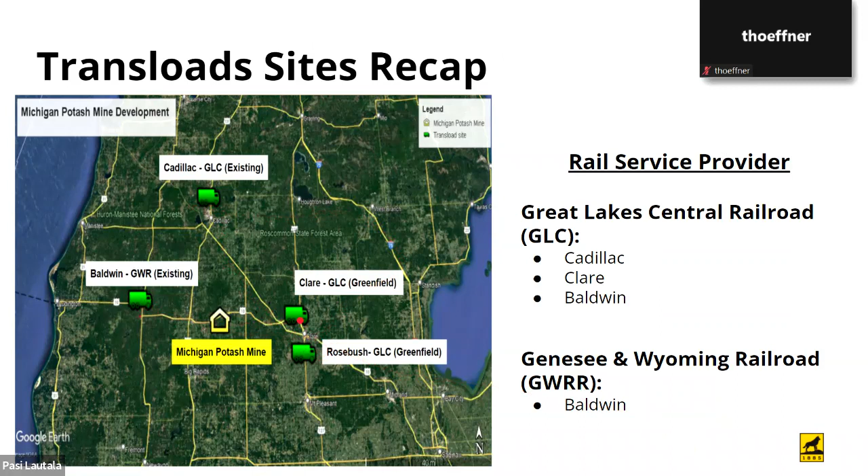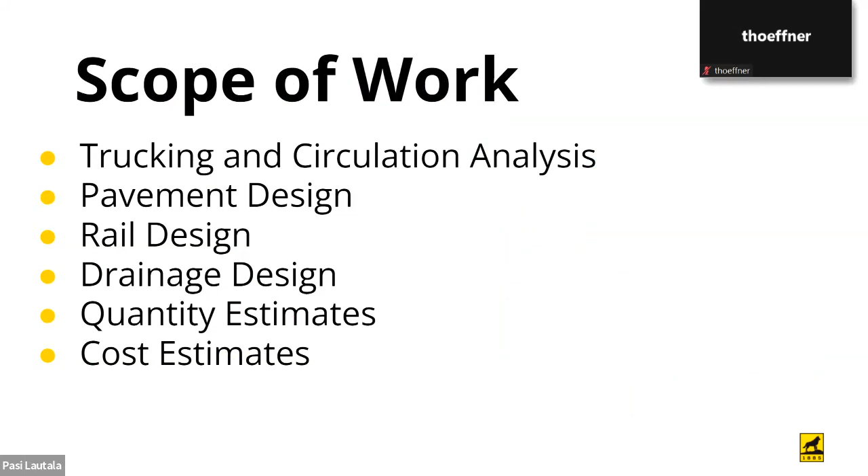So the scope of work for both teams was trucking and circulation analysis to and from the planned mine itself and to the existing and greenfield sites, pavement design for all four sites, rail design or rail operational analysis if there's already rail there, drainage design, quantity estimates, and cost estimates.

So some design-based assumptions are that all sites will be serviced 5 days a week. 5-day operation requires 1 day of storage, which is 13 rail cars. So phase one of the project will be 325,000 tons of potash per year, with the projected expansion for the second phase of 650,000 tons of potash. For our rail design, we use CSX standards. And for our road design, we use MDOT and AASHTO standards.

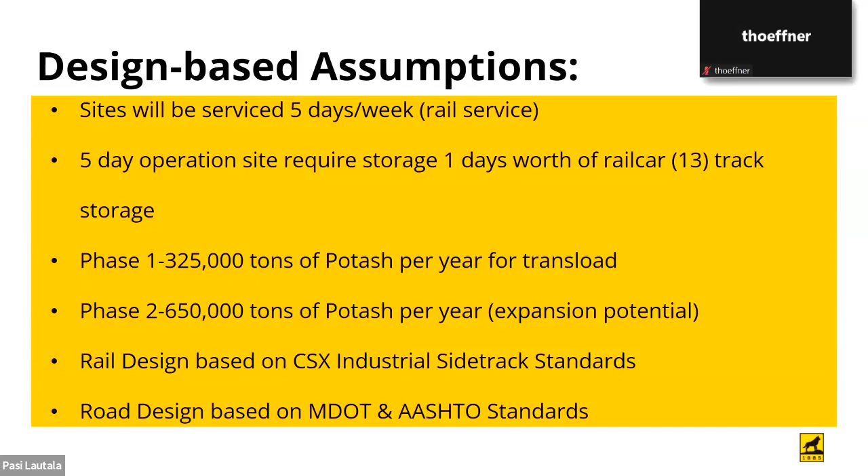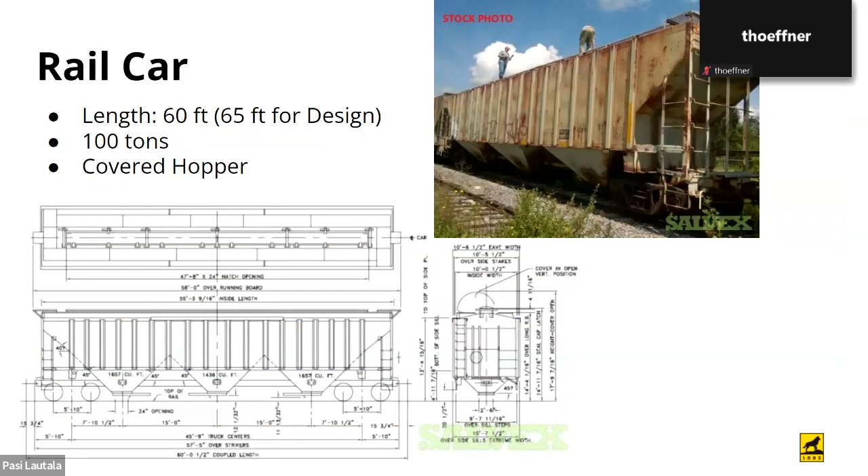So a typical rail car is 60 feet long, but we use 65 feet for design, just so we have some leeway in our estimates. And they carry 100 tons of potash and they're covered hoppers. The design vehicle was called a Michigan Double, which can be seen as 73.3 feet long, and the legal max truck length in Michigan is 75 feet. So we're just under.

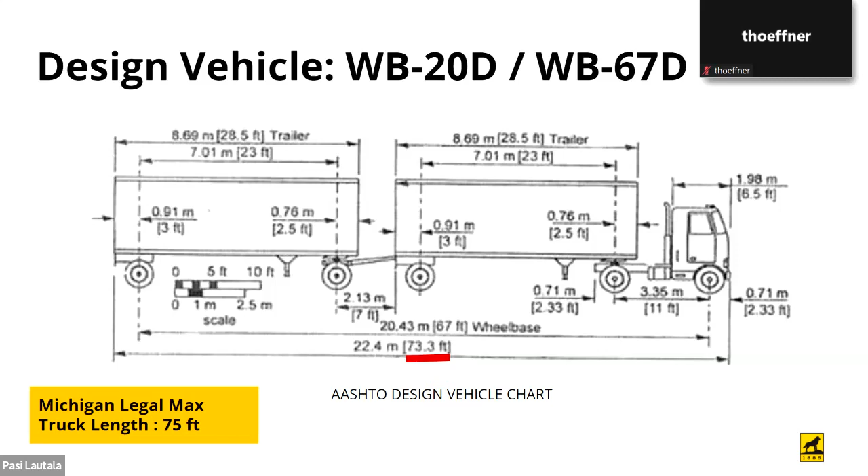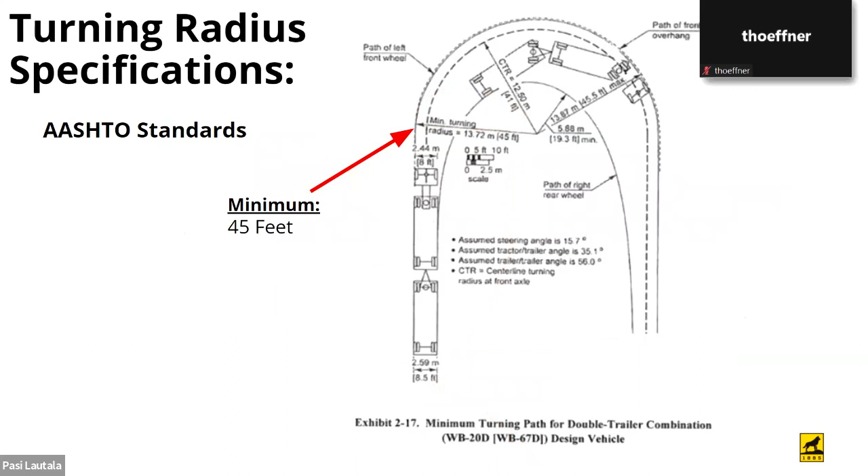The minimum turning radius for our pavement design can be seen as 45 feet from a central point to the outside of the curve. So we use that for all of our pavement design and all of our sites. Here we have some material specs. On the pavement side of things, we started off with a foot of class 2 granular subbase. On top of that will be 12 inches of 22A base. And then we have 3 courses of asphalt. The first 2 will be 2 separate courses, each 2.5 inches of 13A with 0.1 gallon per square yard of bonding agent between them. And then to top it off will be 1.5 inches of 36A.

For the rail, we got 4 inches of sub ballast, 6 inches of ballast underneath each tie. And then the ties will be 6 inches by 8 inches by 8.5 feet. Our rail sections will be 39 feet long each. And these are 115 RE rail, which is a heavy rail designed specifically for mining.

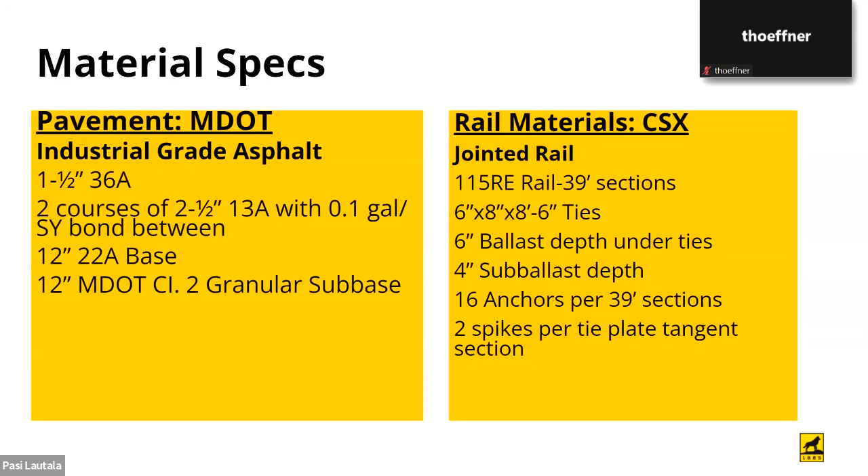Quick overview of why we chose asphalt over aggregate or concrete. A couple pros: it's cost effective, it's pretty quick to install, easy repairs, and importantly, it's flexible under loads, which there will be quite a few of on these sites. A couple cons: it creates greenhouse gases, and its longevity compared to concrete is a little bit lacking, but we feel that the pros outweigh the cons, and that's why we chose asphalt.

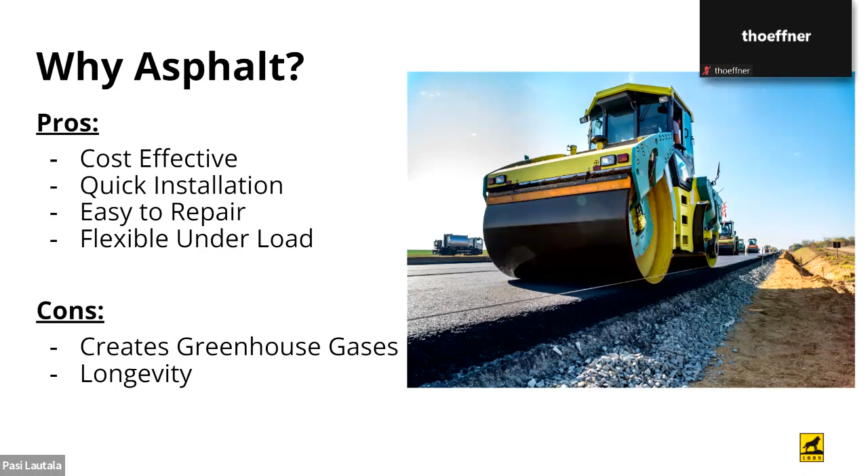This shows a typical pavement cross section. It just emphasizes what I said in the material specs. You've got your foot of granular subbase, followed by your foot of aggregate base, and then 6.5 inches total of asphalt with the 3 separate courses. Oh, sorry, I wanted to go back. The ditching for the most part is going to be what you see here, but each site is going to vary slightly. And the same goes for the sloping and crowning of the asphalt. Each site will vary slightly, but this is typical of what you'll see.

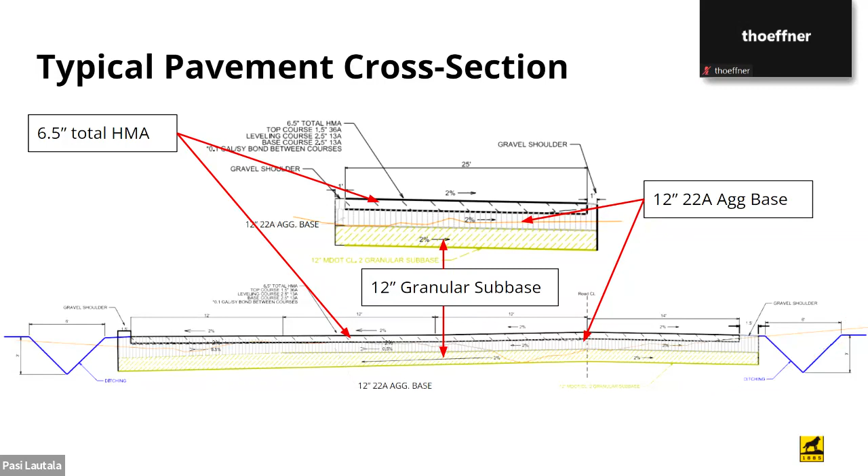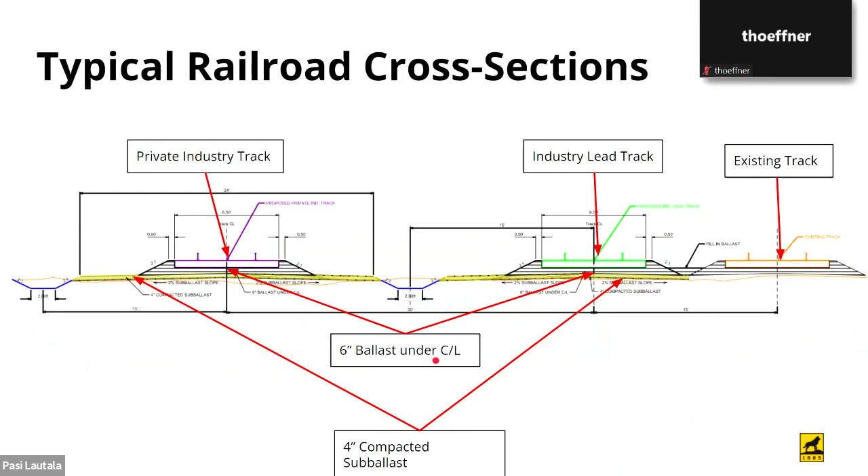Same thing goes for the railroad cross sections. You can see the 4 inches of compacted sub ballast, 6 inches of ballast on top, and then you'll have your rail. And just like I said before, the ditching is going to slightly vary, but that's it for the most part.

And then for our rail operations, we chose to use trackmobiles. This would eliminate the need for a mainline locomotive to be on site for our switching operations. And it also went with our wanting to make sure we did all the switching off the main line. By using a trackmobile, we would save quite a bit in operations costs versus maintaining a railroad locomotive on site and the crew that goes along with it.

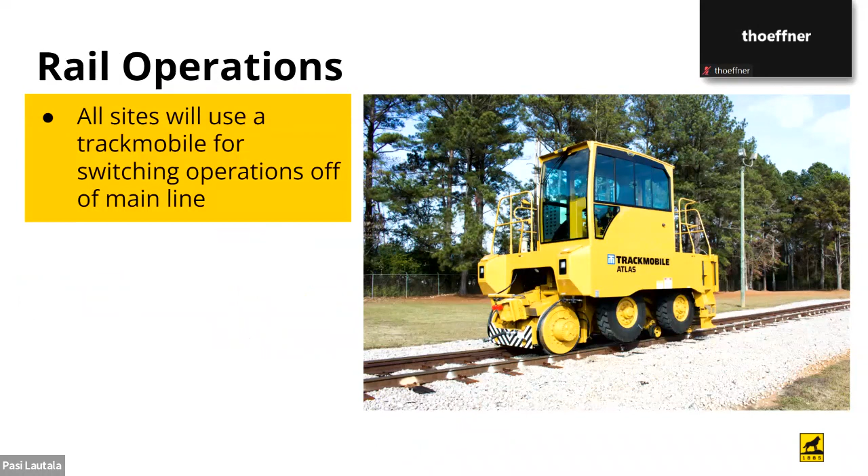And then next up, we're going into our quantity analysis. This is one of our first steps to determine what the size of our sites would need to be. So we started off, all our sites' initial designs are based off of the phase one, 325,000 tons of potash per year. And then we broke it down using 50 weeks per year and a 5-day operations week. This gave us a total of 1,300 tons that would be transported per day. This would be based on one site.

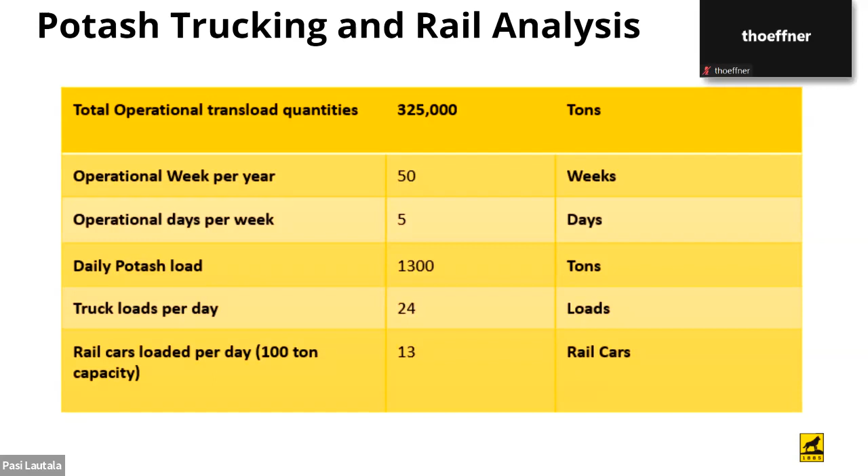And then from that, it would take 24 Michigan double loads per day from mine to transload. And that would be loaded into 13 rail cars with a 100-ton capacity. And then going in here, we calculated travel times between the mine and each transload site. We based this off of using Michigan doubles and a max speed of 56 miles per hour.

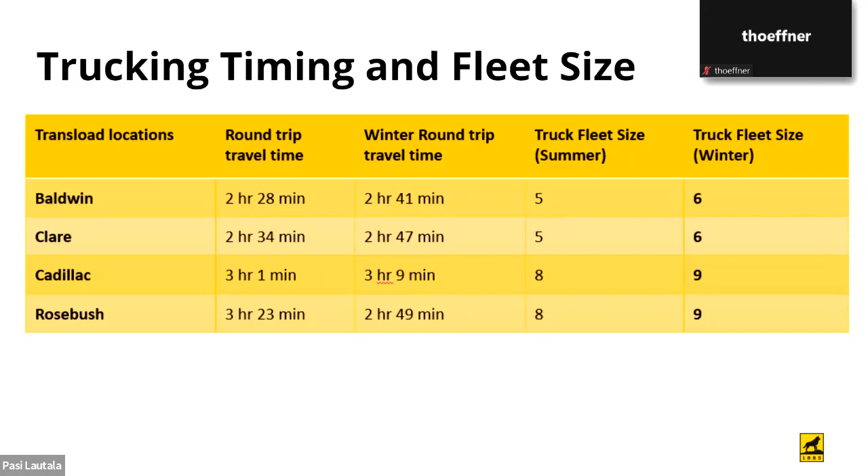And then we did winter timing, and we added 15% onto our summertime to calculate that. And that was because most of these routes are based on either US or M routes, meaning that they are the first to get plowed and get the most attention in winter. From that, we were able to calculate our fleet sizes for each of the sites, with Cadillac and Rosebush needing larger fleets due to them being farther away from the mine site.

Next, we're going to go into our site routes. First up here is Cadillac. The mine here is in the bottom and the site is at the top. We broke it down into Class A and non-Class A roads. The difference being that a Class A is an all-season road. Non-Class A would have to adhere to spring weight restrictions, meaning that we would need to either upgrade the road, or during weight restrictions, they would have to increase fleet size to accommodate a lower capacity per truck.

And then at the bottom here, we went over the lowest bridge rating for each of the routes. The 5 was for all of them. That's a fair bridge, meaning that there is no present concern, but with increased loads it could deteriorate at a higher rate.

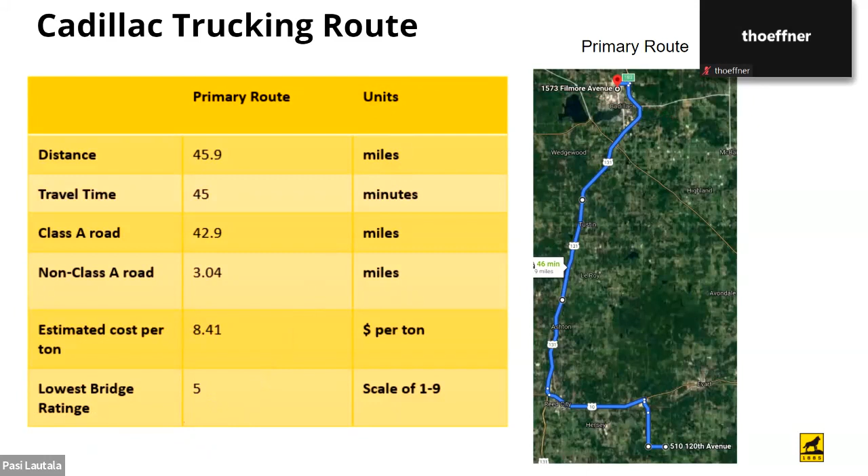One issue with the Cadillac route is here, this is the corner of Boon Road and Mitchell Street, north of Cadillac. Talking with the county engineer, this is the busiest intersection in the county. And there is a light, which would be helpful, but any summer traffic backups would mean this could back up traffic and it would limit expansion, because they would have a hard time keeping traffic flowing.

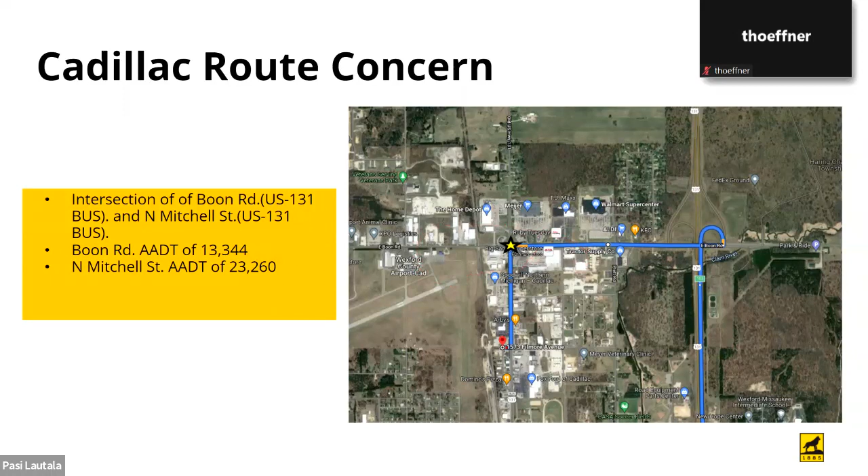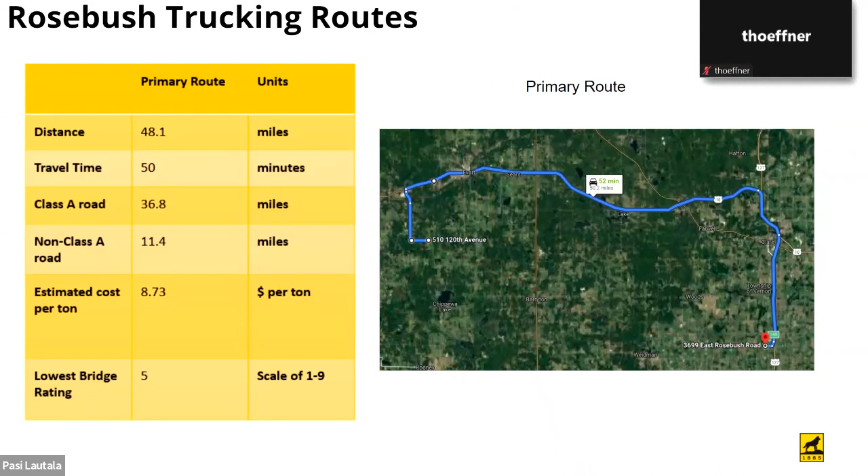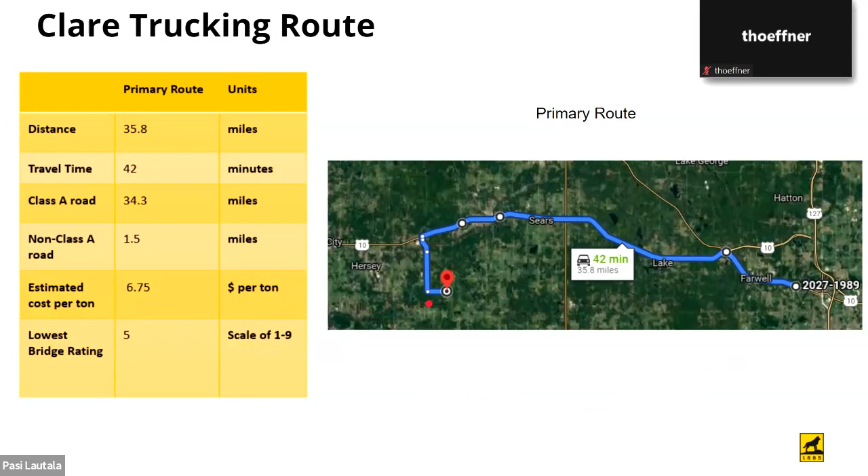Next up is our Rosebush site route with the mine here, and in the lower corner, the site. This was the same in terms of Class A. It had a larger amount of non-Class A, and then it also had the bridge rating of 5. This is our Clare route. As you can see, it's a distance of 35.8 miles and a travel time of 42 minutes. Like the other 3, it's mostly Class A roads, which is good, except for a small piece right by the mine. And then we found no potential hazards or concerns with this route.

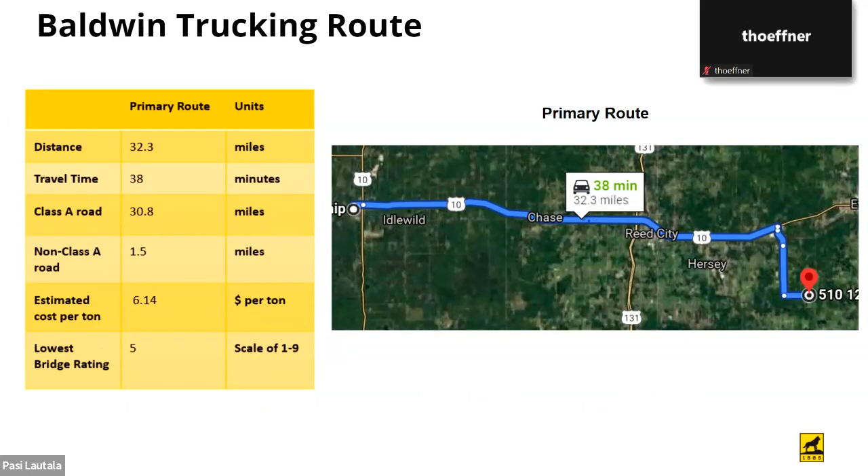Baldwin is a little bit shorter, a distance of 32.3 miles and a travel time of 38 minutes. This is the closest route, and it's a pretty straight shot once you hit US 10. However, we did find one potential concern at the intersection of Washington Street and Michigan Avenue. The trucks traveling on Washington Street will come to Michigan Avenue and have stop signs on either side, while the traffic on Michigan Avenue will have blinking yellow lights, meaning that they will not be stopping. We were not tasked with finding a solution to this problem, but we wanted to make sure that it was known and everybody was aware of it.

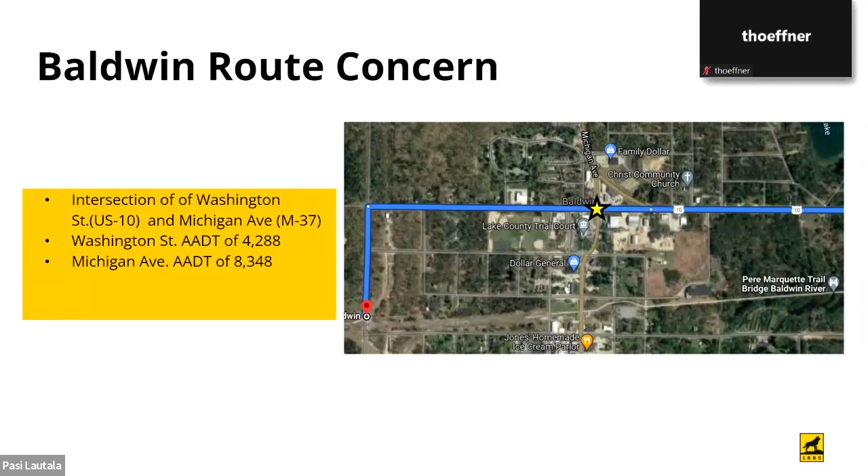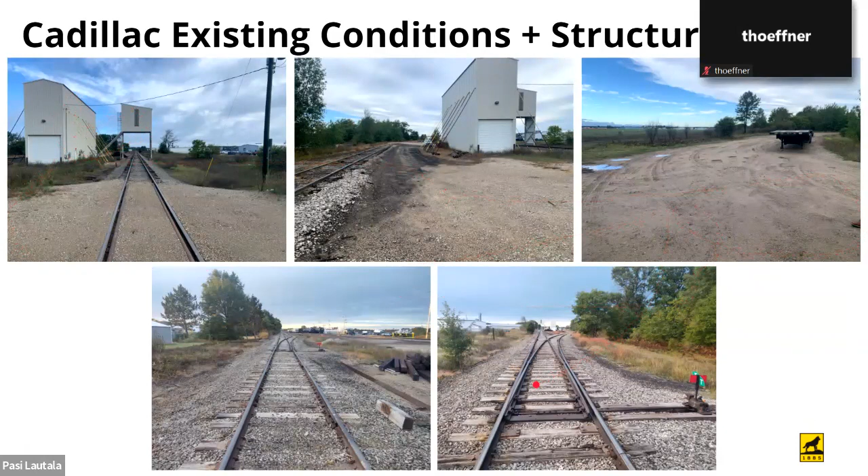So for our Cadillac site plan, we plan to pave this existing gravel loop right here. The trucks will come in, there's some truck parking right here. They come through, unload the potash, and the potash gets loaded onto the train right here. There'll be 3 railroad crossings. This is the only site of the 4 that will have any rail crossings. Some key aspects: paving the existing loop, design storage for the trucks, design drainage for the whole system, and rail operation analysis. Some limiting factors of this site are budget and time, the pre-existing rail conditions, and the parcel limitations.

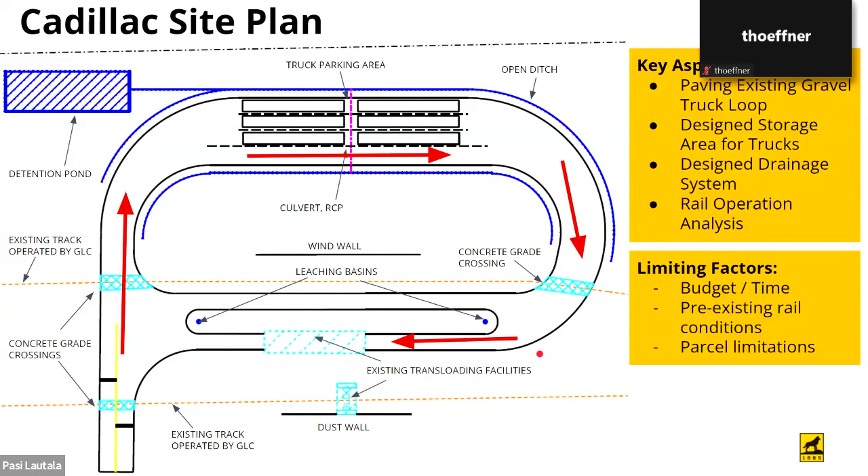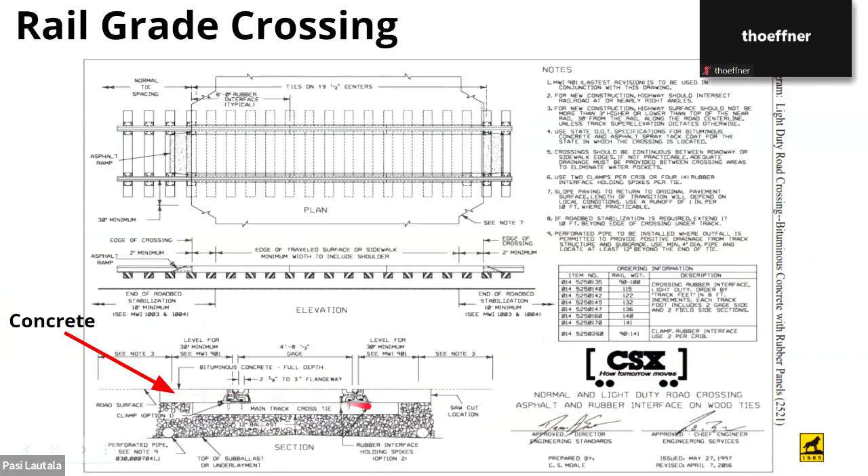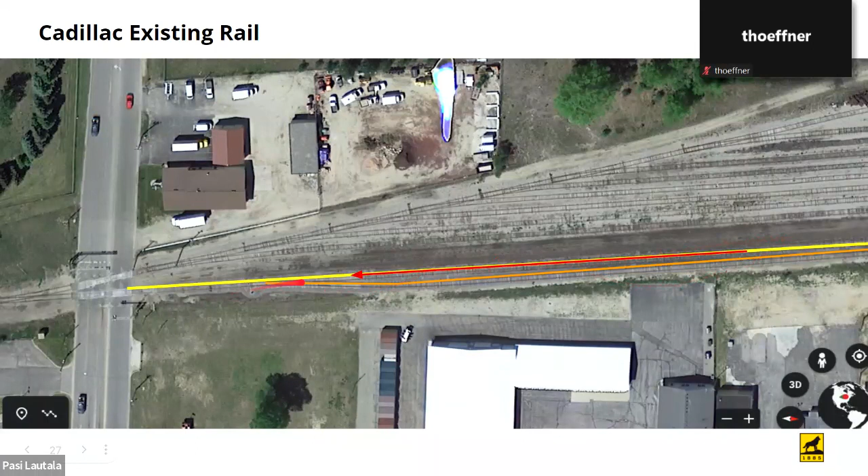So as Russ just said, looking at the rail operations at Cadillac, we had to make sure that the site could actually function properly with the given 13 rail cars that we're designing for. So from that, we have split the existing track into 3 different sections, as seen here. Section 1 in yellow can hold 32 rail cars. Section 2 in red can hold 10 rail cars. Section 3 in green can hold 6 rail cars.

And then here are recommended operations for the site. First, you want to store the Trackmobile on section 3, so it's out of the way of the locomotive when it drops off the empty rail cars at the north end of section 1, just south of the turnout there.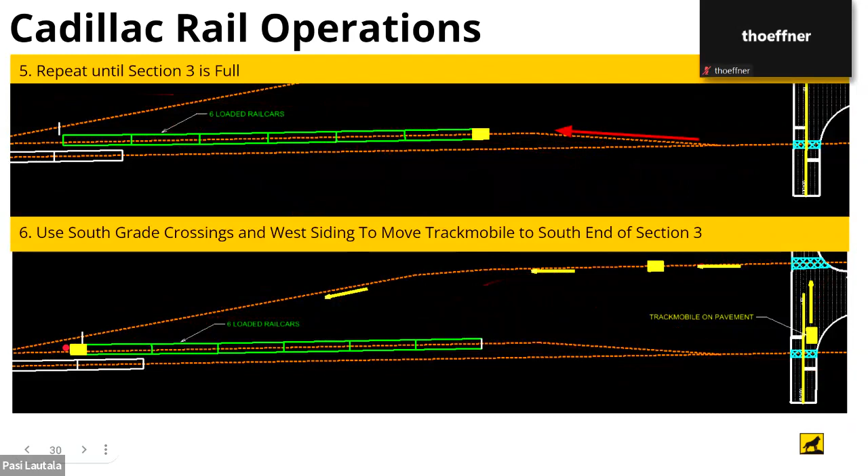And after that, the Trackmobile is gonna have to come off the track using the grade crossing, then loop around using the bypass and come back over and switch on back to section 3. And after that, it's gotta push the remaining loaded cars to the north end of section 2. And for remaining empties, you want to repeat steps 3 and 4 as seen here.

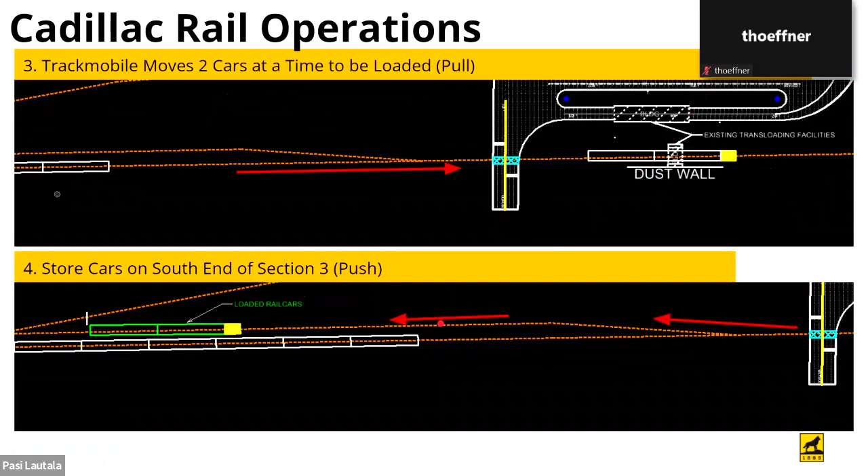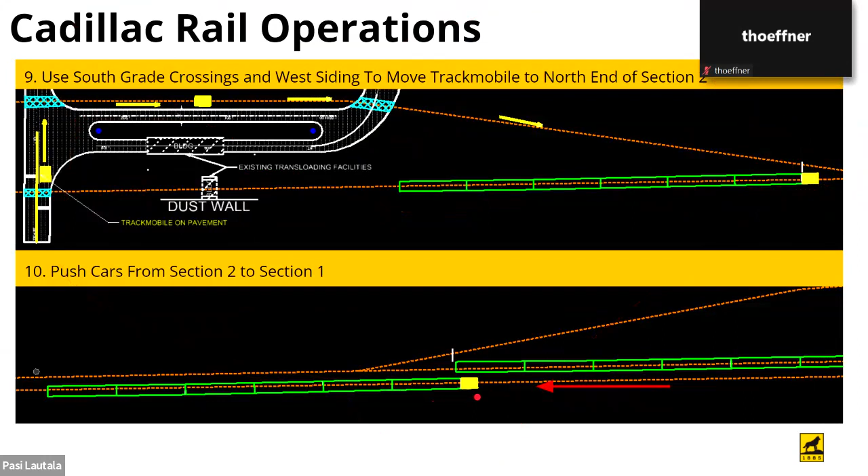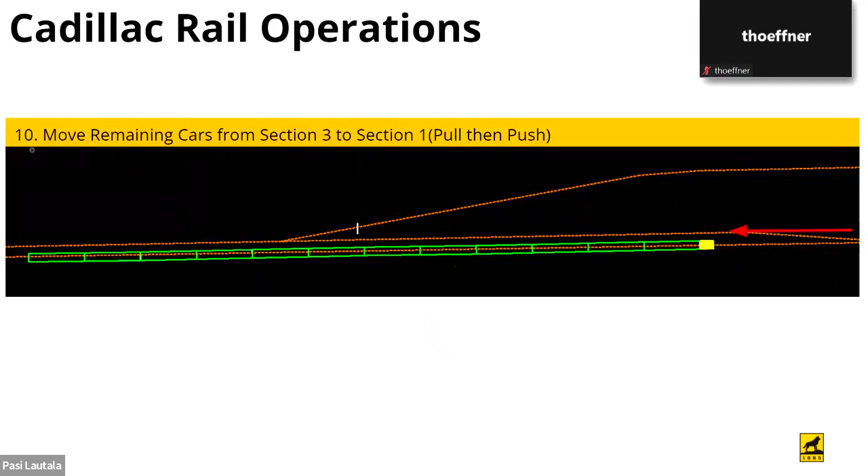And after that, the Trackmobile's got to come off the track again and then move on to the bypass siding and loop around to the north end of section 2, where it will push those rail cars to the south end of section 1. And after that, you take those loaded rail cars from section 3 and place them back onto section 1 here. And after that, the locomotive can come in and take the loaded cars on their way.

So for our drainage design, we were posed with a couple engineering challenges. Since this actual structure is within the rails, essentially we really have two sites, that being this section between the rails and the loop on the west side of the site.

For the west side of the site, we have a 2% crowned road that cross slopes into two 6x3 triangle open ditches. The site has a natural pitch westward, so we would utilize an 18-inch circular concrete culvert, which was estimated to handle the 100-year design storm, which would drain into this open ditch and then out into a detention pond, which was estimated by our environmental team to handle the 100-year storm as requested by the client. In total, the detention pond is 90 by 30 by 4 feet deep.

And then for our section in between the rails, we were really constrained by the existing building. And unfortunately, this section was almost the low point of the site. Right now there is a gravel road and there is no pre-existing drainage. So we assumed that a leaching basin would be adequate, considering that the only runoff associated with this side of the site is from the impervious surface of the asphalt. So we utilized two 48-inch leaching basins approximately 11 feet deep that were analyzed using the first flush method in order to handle the 100-year storm.

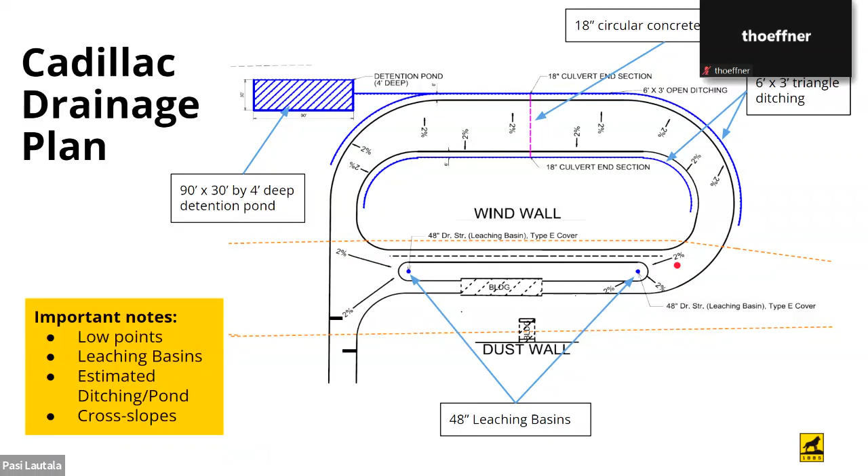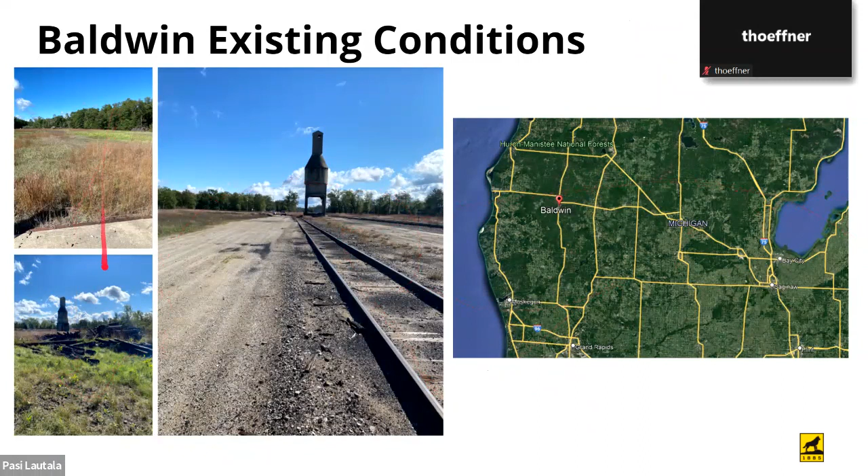Now moving on to our other existing site, the Baldwin site. Here we can see some of the photos taken from our site visit showing the pre-existing track and some of the land around, as well as a map showing again where Baldwin is in Michigan.

So as for the Baldwin site plan, the first thing you can see here is the trucking loop that we designed. Trucks coming in would enter the site here. All this would be paved, and as you can see, it is a 24-foot wide path, allowing enough space for both trucks. And then we can see here that the loop where the trucks will be turning around so they could access the proposed structure is a 60-foot turn radius, which allows enough space to make the turn completely.

And since there are trucks entering and exiting here, we also have a stop sign which would need to be implemented. And then the proposed structure is where it will lie here.

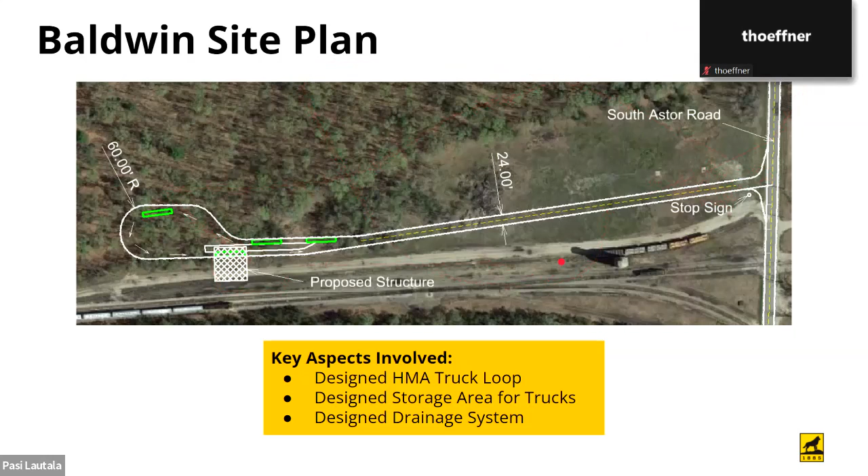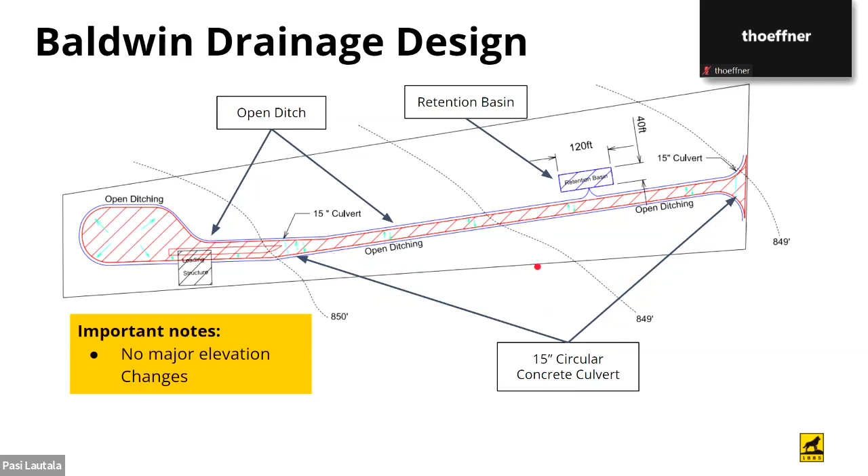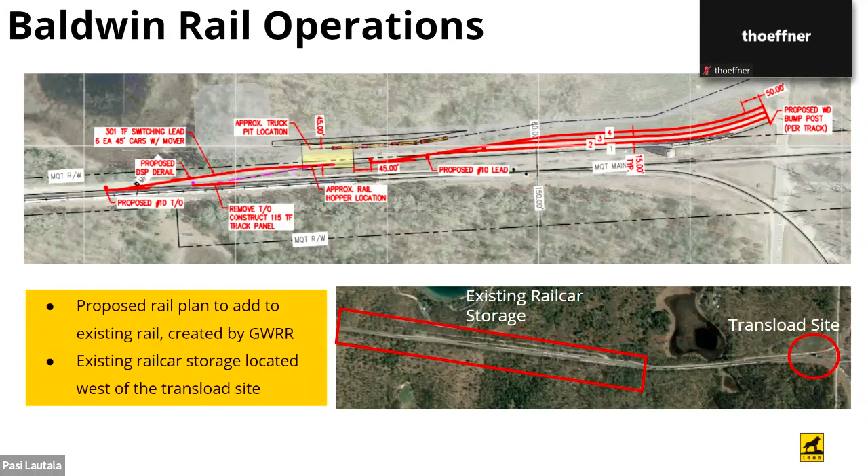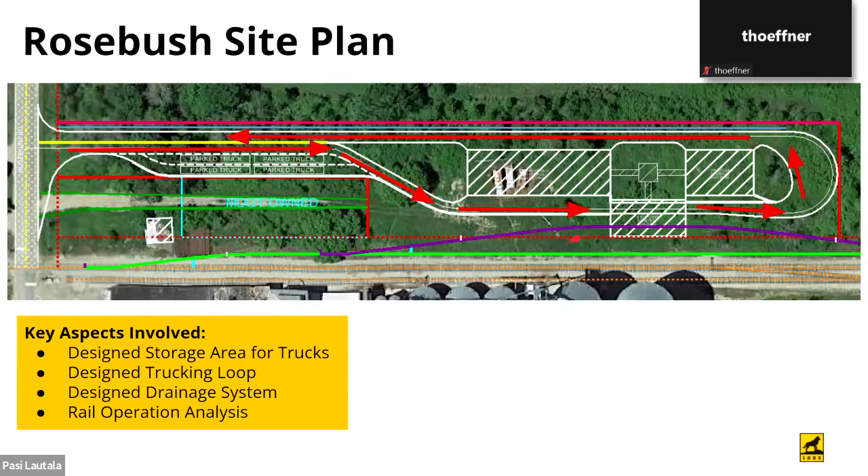Although there might be existing rail at the Rosebush site that's already operated by Brown Milling Incorporated, we have to design new rail for potash operations because we don't want cross contamination between the mill rail cars and the potash rail cars. So with that, we had to build this new rail based off of CSX standards.

And with that, we have two number 10 turnouts connecting the main track to the storage siding, which is indicated as the industry lead track there in green. And then two number 8 turnouts connecting the storage and loading sidings, where the loading siding is the private industry track in purple, and the red box is our proposed loading structure.

On the loading siding, we have 400 feet of available storage. And on the storage siding, we have 1,170 feet of storage, which equates to a total storage capacity of 24 cars.

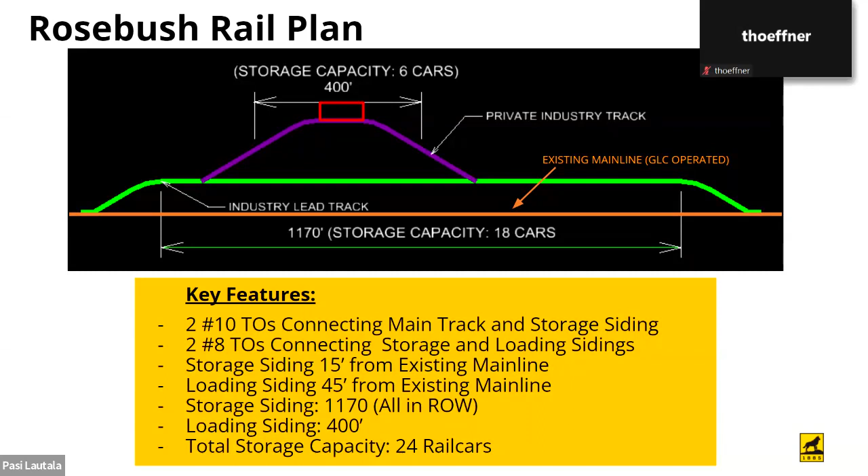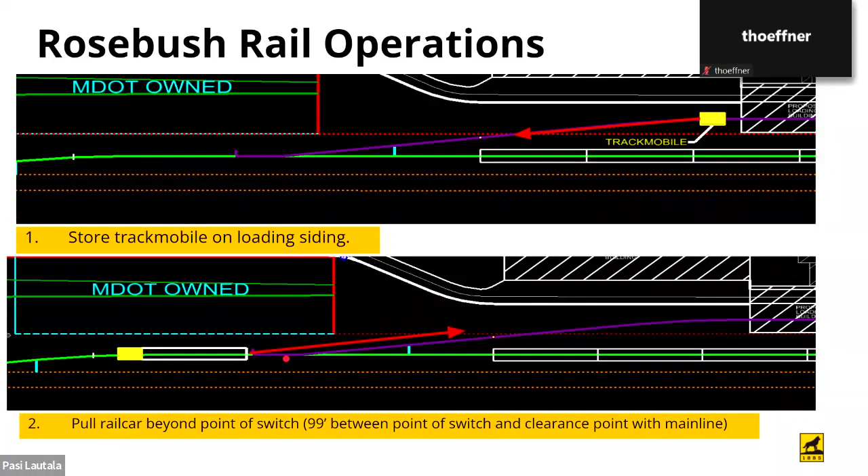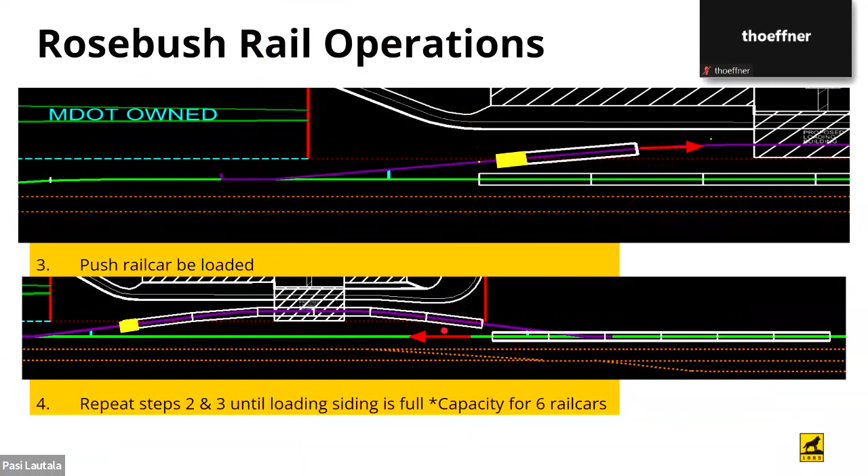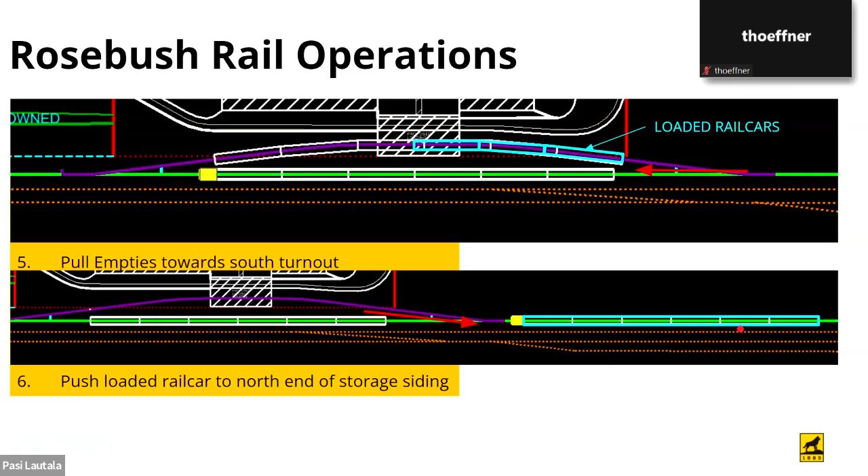And next step, like I said, push the car to be loaded, and you're going to repeat that until that purple siding, the private industry track loading siding, is full. Then we're gonna have to pull the remaining empties forward and then push the loaded cars back to the north end of the storage siding. And repeat that process until all cars are loaded, then we can go back and push all the rail cars together for the locomotive to come and pick it up.

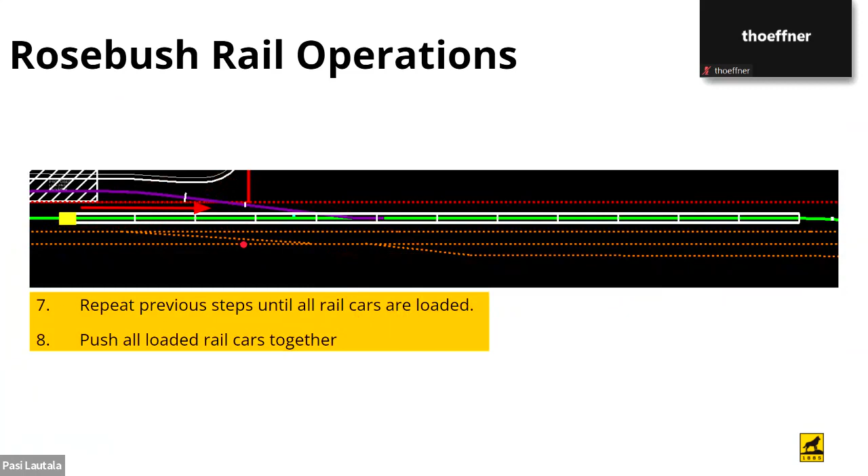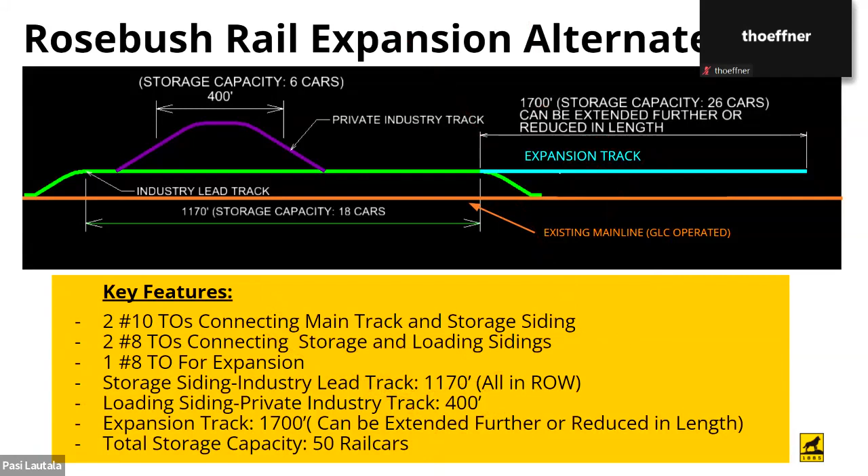And for future expansion, we simply kept the previous design, but added another number 8 turnout for this expansion track. This is going to be a crossover, and we propose that to be 1,700 feet, which has a storage capacity of 26 cars. This can be extended further or reduced in length depending on how operations go and the client's desire. And this expansion plan has a total storage capacity of 50 rail cars, which is plenty, and there's obviously room for more in the future.

So our drainage plan for Rosebush also posed some more engineering problems. As you'll see on this picture and the next, there really isn't a large open detention basin like the other sites. For this reason, we had our environmental team estimate the 100-year storm capacity, which was approximately 570 cubic yards of runoff. And we chose to utilize a 6x6 triangle open ditch that runs approximately 855 feet, which accounts for this runoff. Also unique to this site is the fact that there is a pre-existing structure that ties into the Rosebush system, which offered some leeway without a detention basin.

So as the trucks pull in, you see we have a crowned road that drains to the west towards the open ditch and down east towards a concrete curb, which drains into a gutter system. The culverts that run under the road are 15-inch circular concrete culverts as compared to the 18-inch at Cadillac. And another important thing to note is that the longest culvert we have running here is approximately 150 feet, which did add significant cost to the drainage plan. Another significant cost was also the concrete curb and ditch, which was incorporated into our overall drainage cost in the further slides.

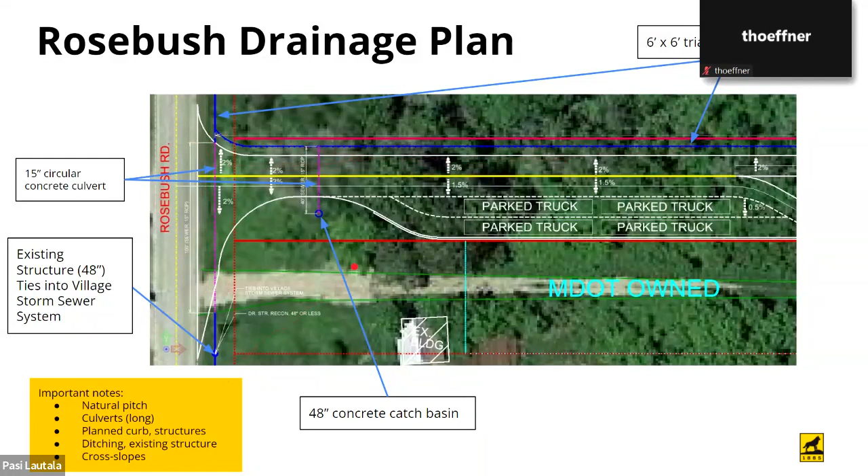The concrete catch basin is a 48-inch, and it should also be noted that there is a natural pitch southward towards this pre-existing roadside ditch. So that's what enabled us to use this open ditching system that ties into the existing structure. So this is the second half of the site. Again, it's important to note that we have 2 more road crossings here with 15-inch circular concrete culverts and 2 more 48-inch catch basins.

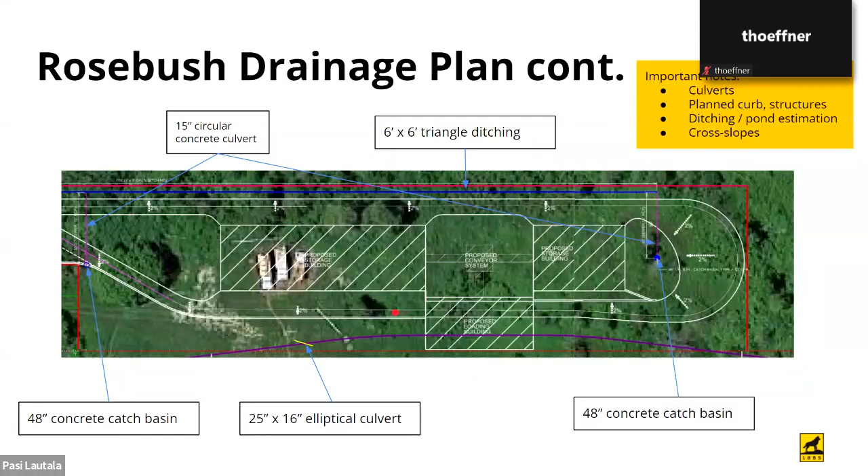We did run into a problem here because since there is ditching in between the 2 rail lines, we did have to have some sort of railway crossing, which we estimated through CSX standards to be a 25-inch by 16-inch elliptical corrugated culvert. And as you can see here, here's the concrete curb, which drains backward into this structure. And it should also be noted that on the west side of the loop, we have a cross slope into the open ditch. And as we round the curve, it drains into this structure and then back against this curb. And as we make our way through the high point of the site, which is the proposed loading building, it drains away from the loading building in both directions.

This is our final proposed site. This is the Clare site. It's the largest site. 3 of these images are from our site visit. This one here shows the existing main line owned by Great Lakes Central, which is about 5 feet above the existing ground surrounding it. And here's just a map to touch back on where Clare is located.

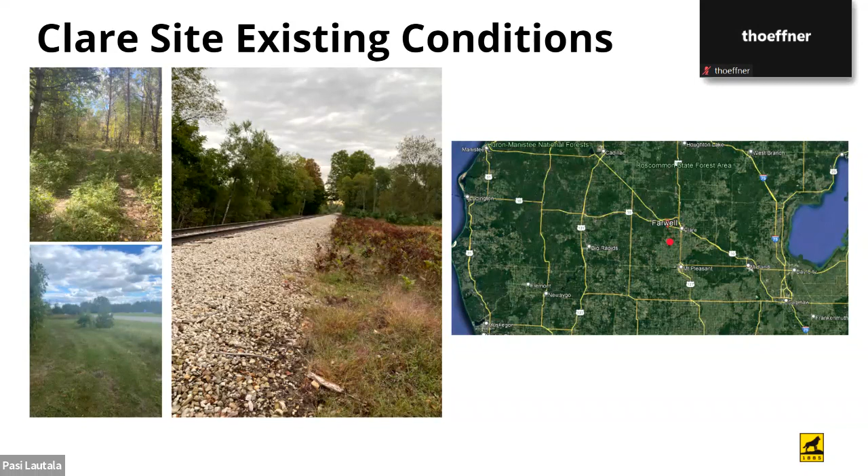Here's our primary design. It's designed to be serviced after a maximum of 1 day. This was in response to the wetland delineation when we found there to be no wetlands. We were able to use the entire property. This allowed us to use 2,980 feet of total track, which is the entire rail front property. And this is space for 12 cars east of the structure and 12 cars west of the structure. The yellow line here is the MDOT right of way, so everything will be just outside of the MDOT right of way.

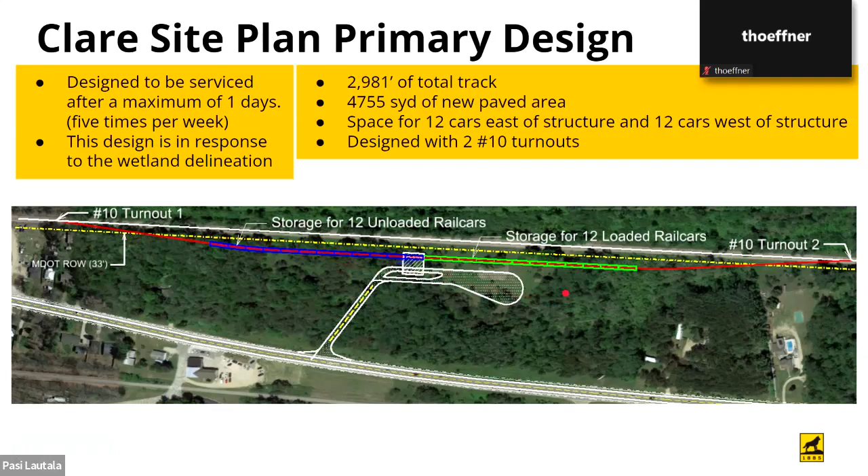This is the primary pavement design. All the truck turning radiuses are designed for 60 feet. And the green boxes are designed to be in scale for the size of the trucks. So you can see there'll be space for trucks to wait to unload the potash.

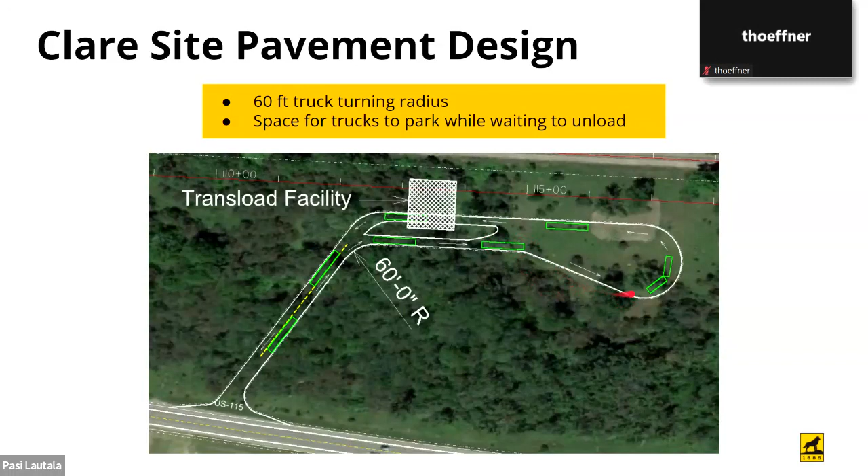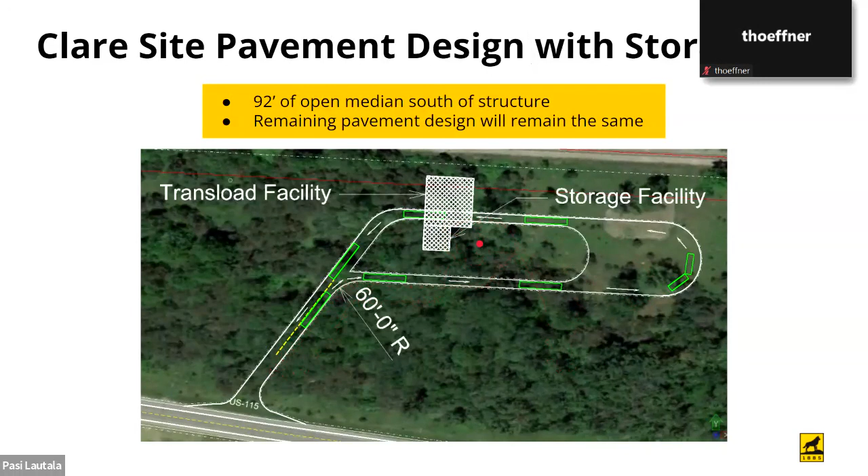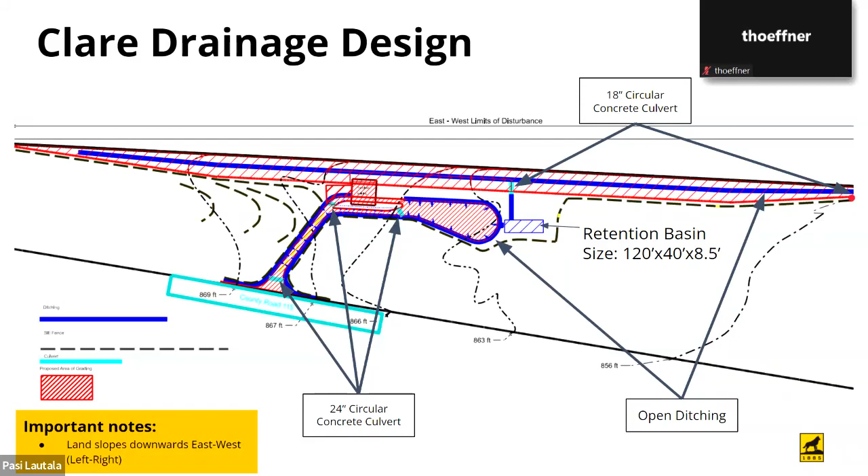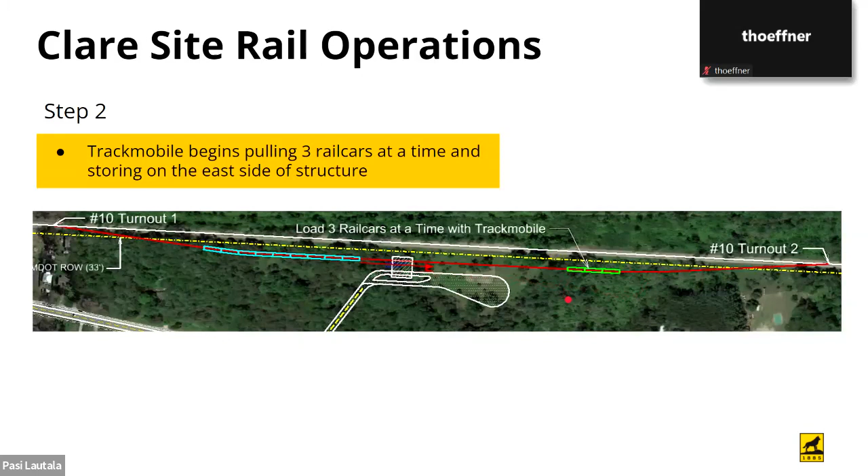And this will be done 3 more times till all 12 cars are on the east side of the structure, where they will be picked up by the locomotive and carried out. And then 12 more cars could be brought back in and stored back on the west side, where we can repeat the process.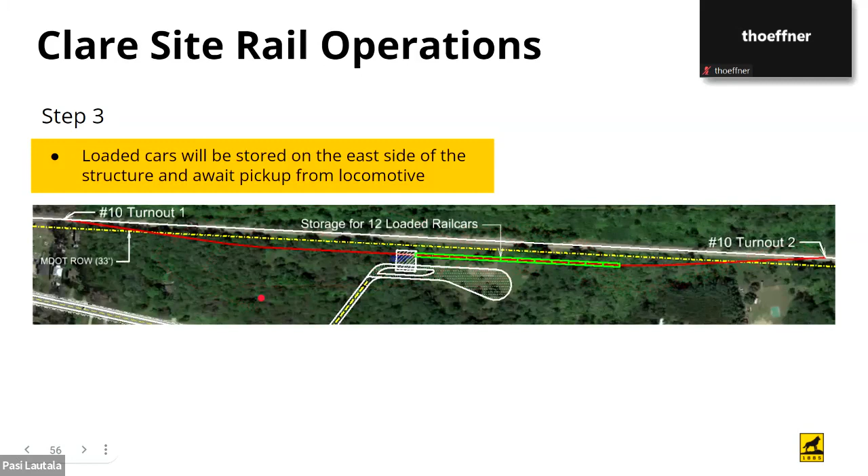So here we have the typicals for the Clare site for the rail. One thing to note here, we had designed a path of about 15 feet for the trackmobile to move around the cars and around the structure. That is so the trackmobile would have somewhere to move while staying off the main line.

One thing about Clare is that the elevation of the side track deviates from the main line quite a bit. I'll show it in a later slide, but the existing track from one side of the property to the other is about 20 feet, and to be able to store the cars on a more level surface, it does deviate quite a bit. Like Mitchell said, we do have an open ditch for drainage. We see here, we have 6 inches of ballast under tie, 4 inches of granular material.

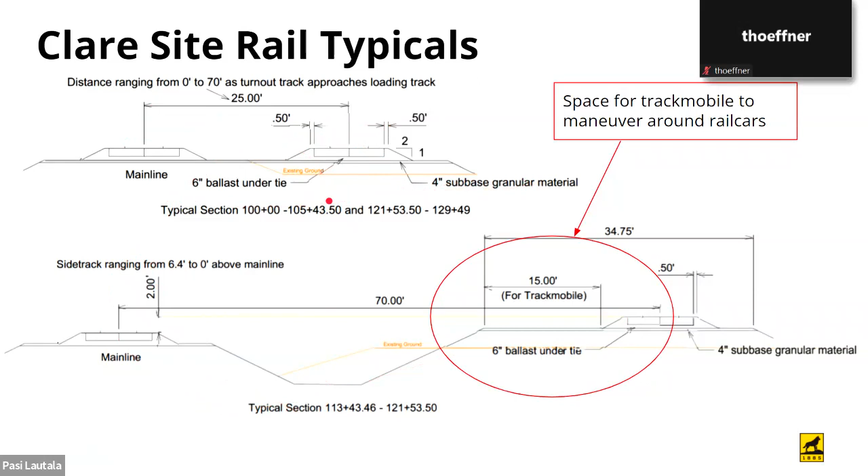And here we have an expansion option. This would be about 40 feet from our proposed design, that would be 30 feet from the existing. So we'll have storage for 24 rail cars due to elevation, being able to store them on level ground. By having this 30 feet off the main line, we are able to have it inside of the right of way to be able to use relay rail. And these will utilize number 8 turnouts on each end.

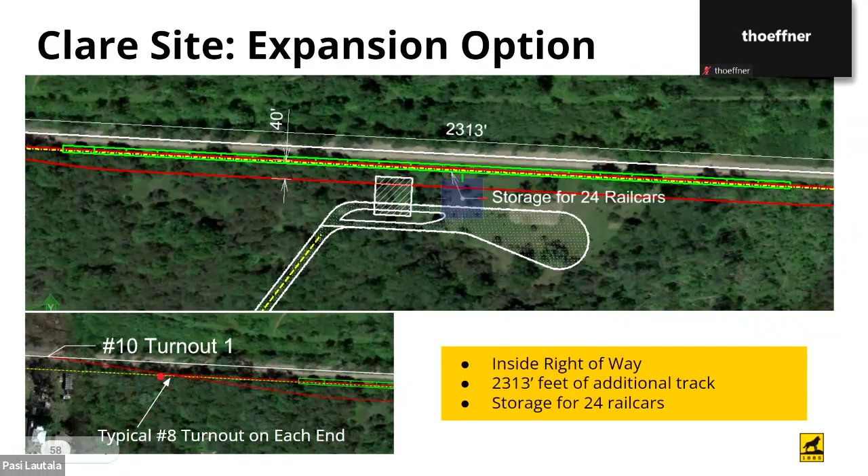Like I mentioned earlier, from what we were able to get with Google Earth and USGS topo, we had gotten 20 feet of elevation difference between each of the turnouts for our proposed design. And that's about 2,975 feet. The turnouts would be constructed right at the edge of the property. So the property lines will need to be surveyed to know exactly how far that is.

We were able to have 24 cars of storage on this 0.25% grade, the 12 loaded and 12 unloaded. So that would leave the rest of our rail to be constructed at a 1.47% grade, and that's not ideal. That will maybe be of some concern. And then to make the most gradual grade, we had to use the 100-foot minimum vertical curves, and right here will be the storage building, and that was designed at a 0% grade.

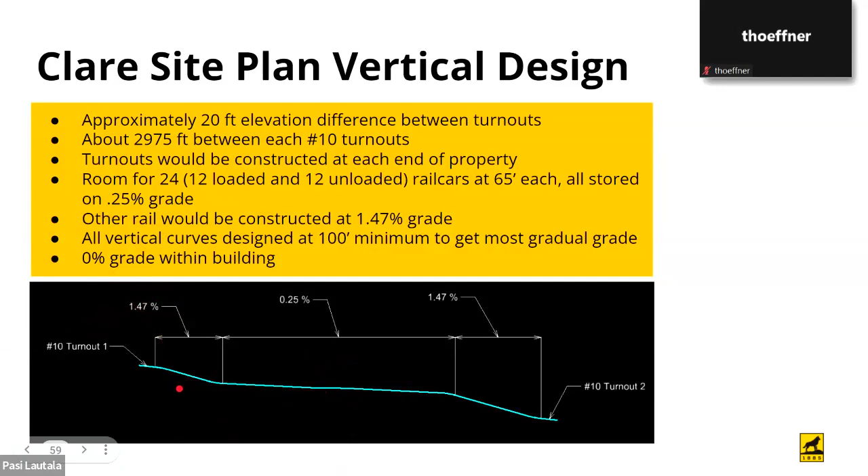And then this is our preliminary cost estimation for each site. We broke it down between railroad, roadway, and drainage. And these costs are just for the transportation side. Our sources for our railroad was industry standards over the last year. And then our roadway and drainage were taken from the 2021 January through June MDOT weighted average. And where possible, we took a region specific for each of the sites.

And then looking in further, one major cost savings for some of the sites is relay rail. Relay rail is rail that can be used within the MDOT right of way, rail that MDOT has on hand that would provide major cost savings to the sites where it is most utilized. And that currently, without expansion, is Rosebush. It would create the largest cost savings. And then Clare is the other site where it would create cost savings, and that could help with the expansion alternative.

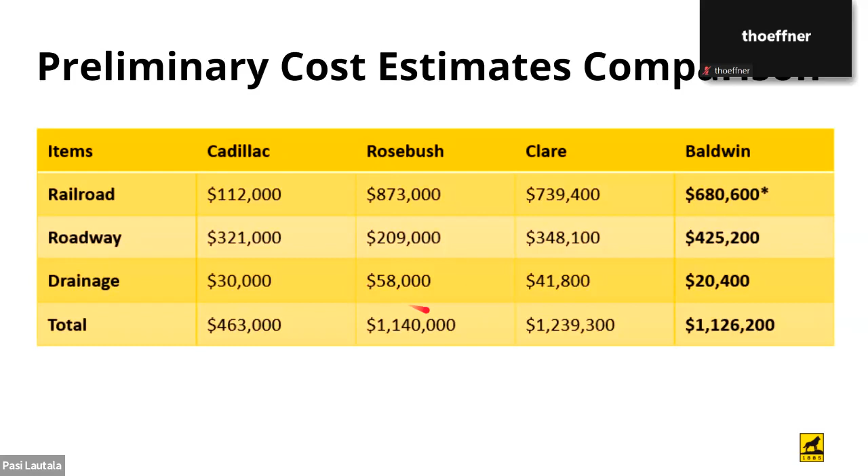From the sites, we see that Cadillac is the cheapest. That is because it has the most existing infrastructure of these sites. And then next up is Rosebush, and this is because it is the smallest of the non-built up sites. And it has the largest drainage cost because of the complexity of the site and it being smaller, making it harder to get away with just open ditching. And then the Clare and Baldwin sites are pretty similar, with the costs being close due to the similarities of their designs.

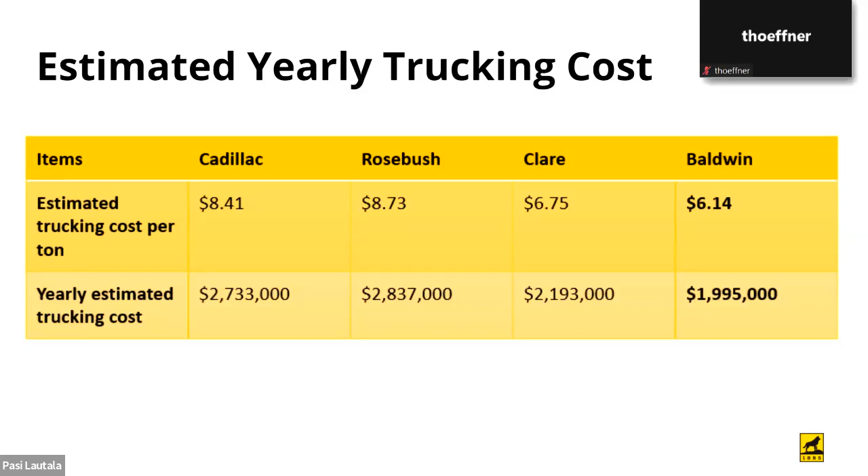This leads into our recommendations. So we came up with a few recommendations for which site we believe would be the best site to use, or best sites. So our number one recommendation is the Baldwin site. This site has access to the Genesee & Wyoming Railroad, as opposed to Great Lakes Central, as the other three have. It is a fairly big site. I believe it is 8 acres. So there is room for expansion. And there is an existing rail yard very close to it to be able to use for storage.

But one of our main reasons for this recommendation is it's the shortest trucking route, so that compiles year after year of being the cheapest. One thing to note is the intersection that Trent had pointed out in the trucking.

So our second recommendation is Clare. This one is accessed by Great Lakes Central. It is the largest site at 19 acres, and so there is room for expansion. And like the first one, this is the second shortest truck route, which makes yearly operational costs cheaper. Easiest access to road. It is mostly on highways and US routes. So mostly Class A, like Trent had said, other than the 1.5 miles right by the mine.

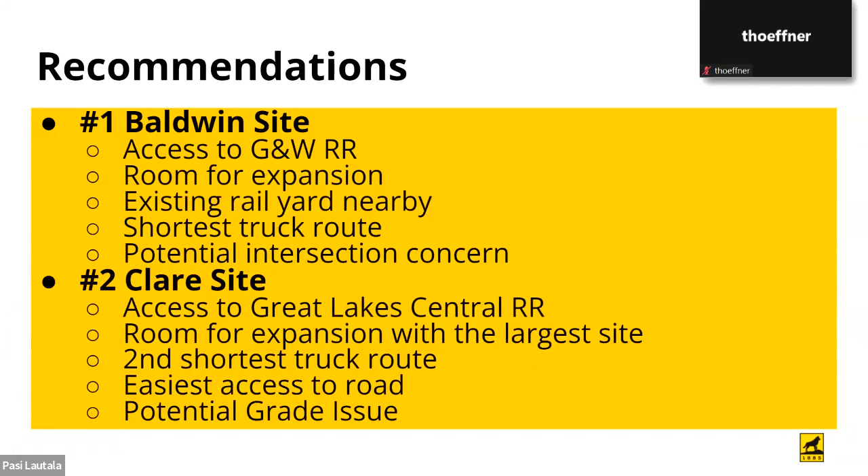And so for our next steps, we would recommend to inspect the existing rail conditions at the Cadillac site. Have professional surveys done for each of the sites, especially Clare, I believe. It would be good to know exactly what the elevation difference is, and hopefully it is less than what we believe it is. Soil testing for each of the sites. And then we would want the vertical design professionally done with the professional survey information.

And like with all construction, MISS DIG will need to be done. And then the review of all the operations with the railroads for each of the sites, whichever one is chosen. Exploration of other expansion alternatives for each of the sites, and for any of the non-Class A roads that are used by the trucks, I guess there'll have to be analysis done to see what will be needed to upgrade the roads.

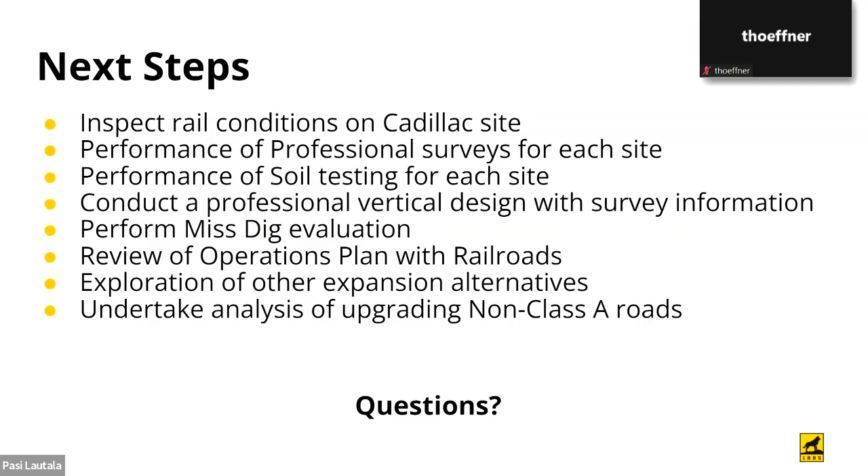Let's see. Well, I don't think we're gonna be getting an early lunch today. Looks like these guys are in a talking mood. You can go to the updates and stuff, so. Yeah, you guys.